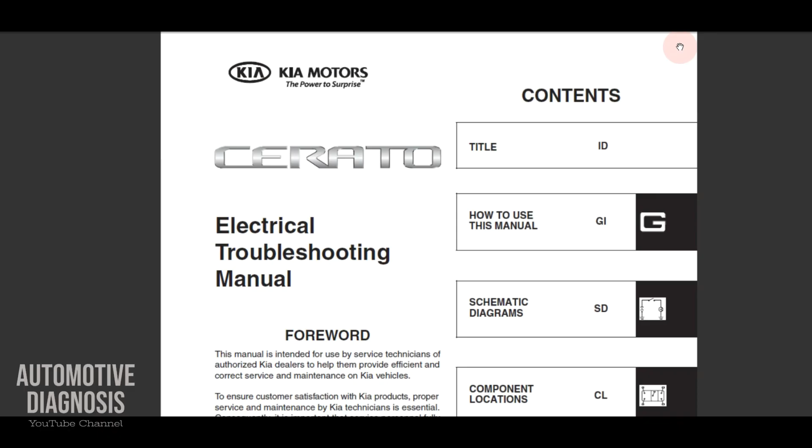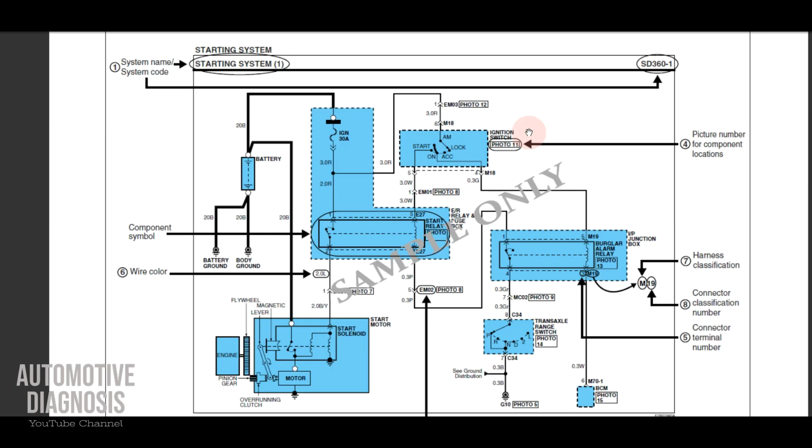Okay, let's start. So for this PDF file, I have all the systems together. At the beginning, I have a really quick introduction for reading the wiring diagram. I will explain everything later in another wiring, because here is too much information. It's really hard to explain. If you go forward, you have some other information for some symbols in the wiring as well.

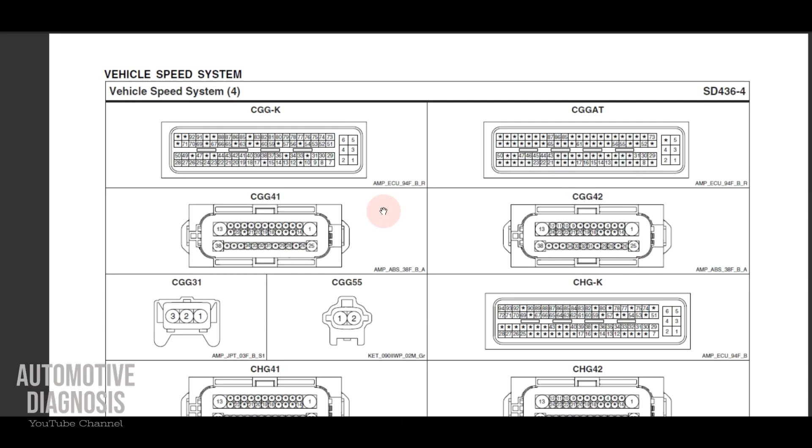But let's start just talking about a real wiring for one system, for example, the starting system. Obviously, if I go to other pages, I have other wiring like for charging system, vehicle speed, automatic transmission. All of them are in this PDF file. But I start from the starting system because it's more familiar for you guys, and it's easier to understand. So heaps of information here as well.

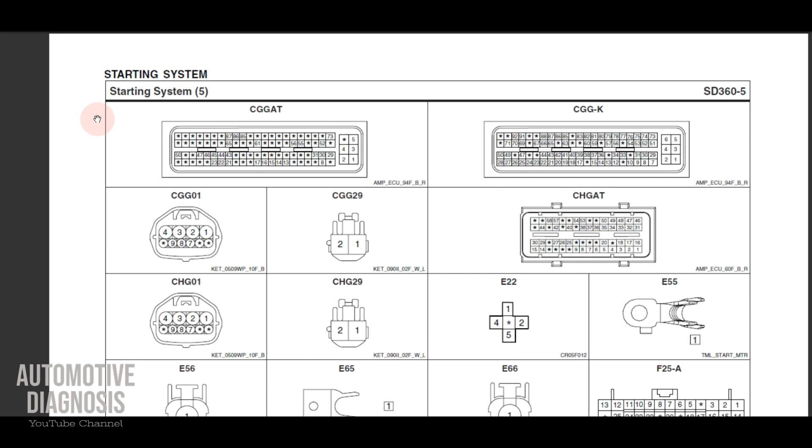So you see at the very first page, you have starting system page one. Number one shows you that you don't have only one page for this starting system. You may have different pages as well. Page 2, page 3, page 4. And the reason that I'm explaining this is because sometimes you download the file from some website, you just get one file, one page, and that page is not applicable to your car.

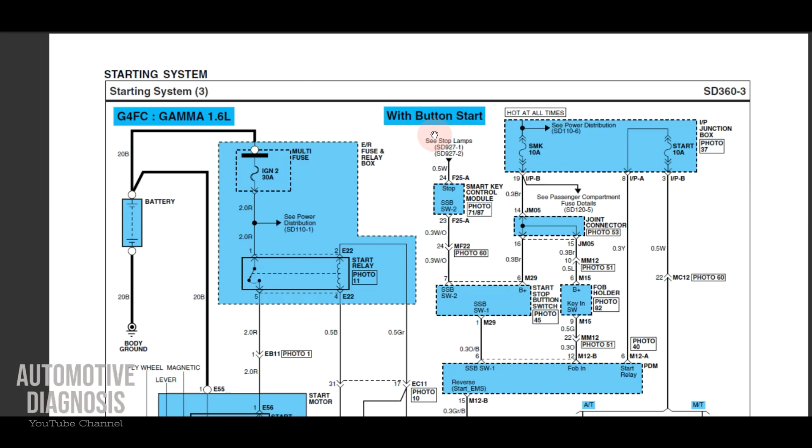Like this starting system is for the G4FC engine, Gamma engine 1.6 liter without button start. So obviously this one is applicable for this car without smart key system or button start. But if you go to the next page, you see the next page is for the Theta 2 2-liter engine, and page 3 is for the 1.6 liter engine with button start. So you have different pages for the starting system for different engine types, or when you have different options like button start on the car.

That's why you gotta be careful when you are looking at the wiring diagram. You want to make sure that it's exactly applicable to your car. Otherwise, you may have wrong information. So, I'll zoom out this one a little bit so everyone can see.

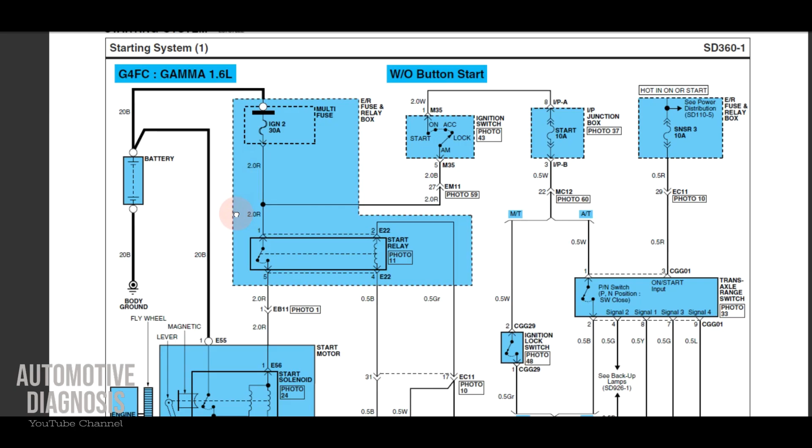So, in this wiring diagram, first of all, we have a couple of boxes shown here. All of these boxes are actually the components that are involved in the starting system. On the left, I have the battery. This is the battery. I have the ER fuse and relay box, ER meaning engine room fuse and relay box. I will explain this one because we may have different naming on Kia and Hyundai for fuse and relay boxes.

This is the ignition switch, IP junction box for the interior fuse box. Again, I have the ER fuse and relay box here as well. This is a starter, ignition lock switch, and transaxle range switch. So the first step for reading the wiring diagram obviously is to identify the components. If you don't identify the components, it's going to be really hard, maybe confusing as well. So identify the components first, then you can start finding the connections between these components to get more information.

First of all, about the component names, because this wiring diagram is for Hyundai and Kia, I'll give you some more information, like for the ER fuse and relay box. As I told you, ER stands for engine room, so this one refers to the engine room fuse and relay box. But sometimes on Kia and Hyundai we have different naming for fuse and relay boxes, so I'm writing it down on the right side of the video. If we have E/R fuse box or fuse and relay box, this refers to the engine room fuse and relay box.

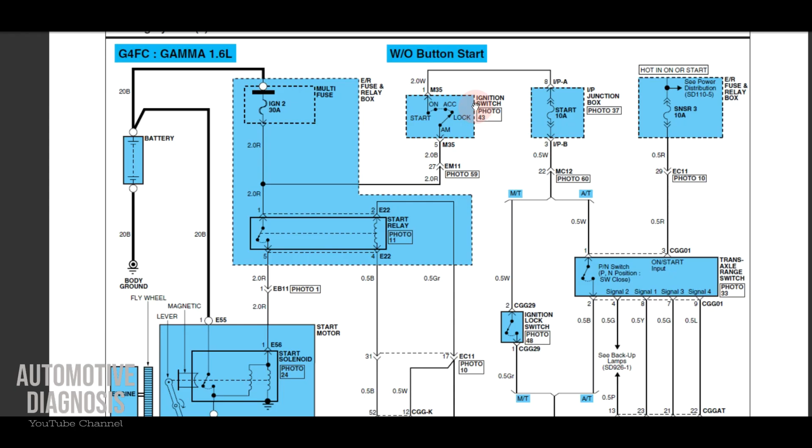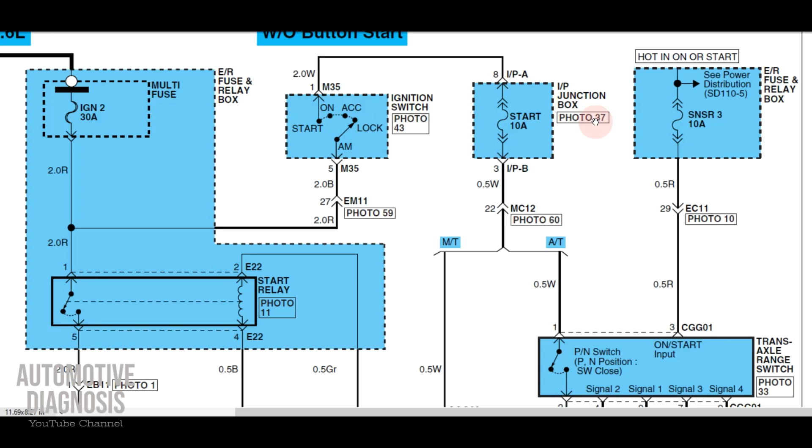So now we know the component names, because the first thing we did was identify the components. Something really important next to each component is the photo number. For this one, I have ignition switch photo 43, 37 here for IP junction box, and even some connectors in between have a photo number. This photo refers to the component location. So if you're looking for the IP junction box and you have this PDF file with all the other files together, just go to the very last pages where you can see all the component locations, in sequence by number, and find photo number 37.

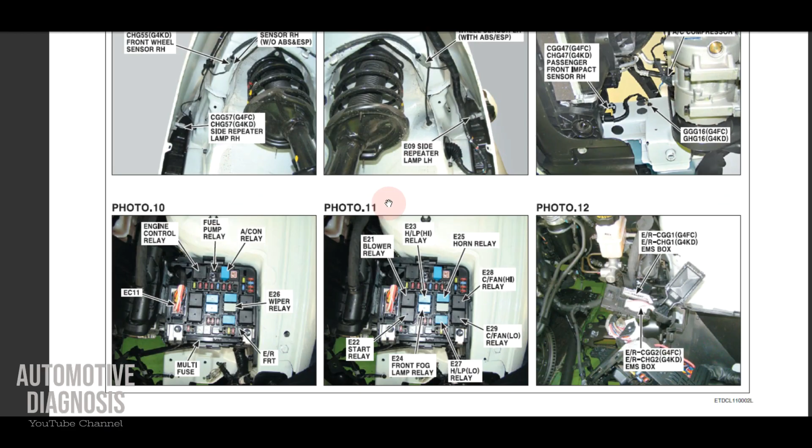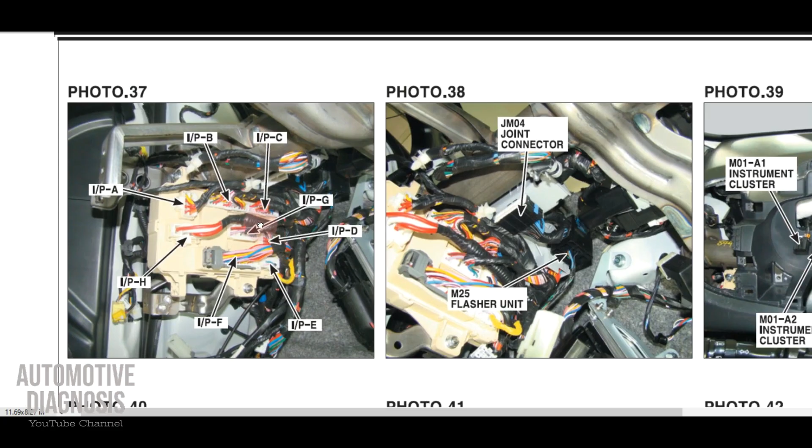Let me find it for you right now. Okay, this is the component location. You may have this in this file or in a separate file. If files are separate, you just need to download the component location file as well. We are looking for photo number 37. See, all the photos are numbered here, and you have real photos taken from the car. I find 37, there you go. Photo number 37 refers to the IP junction box, which is the interior fuse box. And you see all the connector naming and locations as well, which I will talk about later.

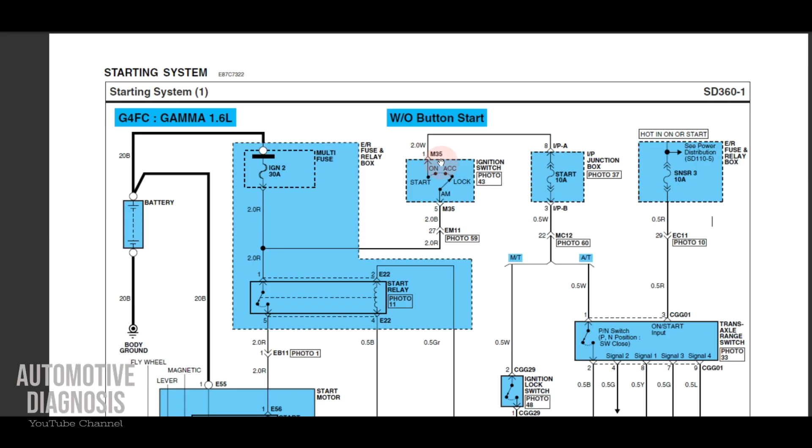You have all the other photos taken from the car as well, which will help you locate the components. If you're just looking for a component location, you can find it in the wiring diagram. But if you use the online wiring diagram or the GDS, it's going to be a bit different. I will show you later how to do that.

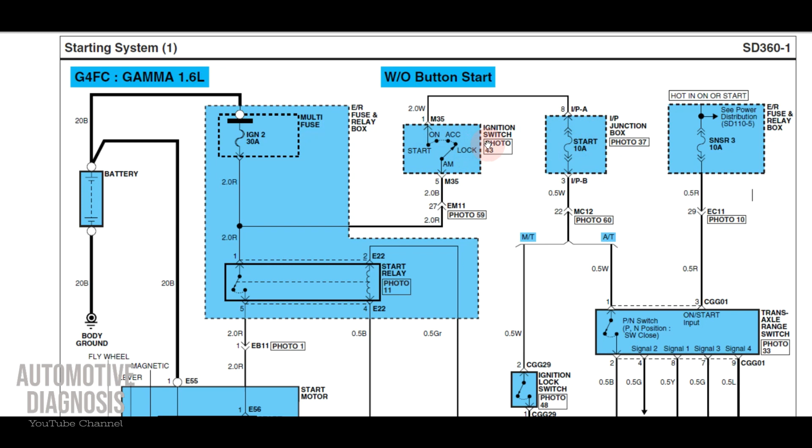Between any of these components, of course, I have the wiring. You see, I have this wiring between IPA, actually between the IP junction box and the ignition switch. So for example, if you are diagnosing a car on the starting system and the car doesn't crank at all, you are checking this fuse here, the start fuse in the IP junction box, and you see that you don't have any power on this fuse.

So technically, when you turn the ignition switch to start position, when you crank the engine, this switch will change position from lock to start, and it will pass the power from this fuse, IGN 2 30 amp, through this wire all the way to the ignition switch. And because the ignition switch is turned to start position to crank the engine, this power from this wire will go all the way to the IP junction box, to this fuse.

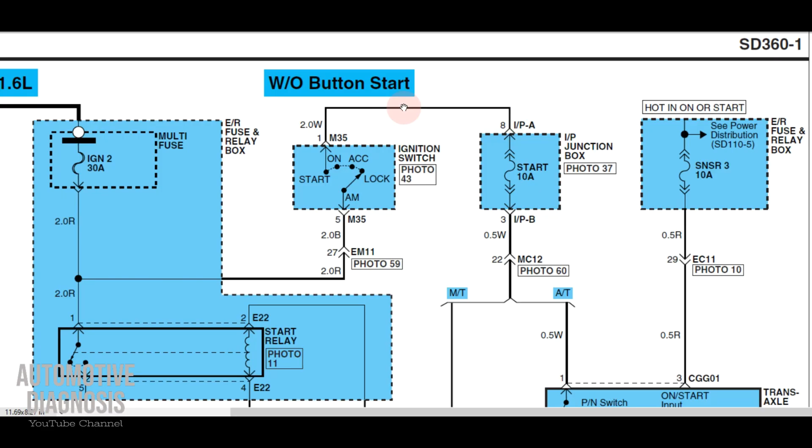So you see that the car doesn't crank, you check this fuse, and there is no power on this fuse. So it could be from anything before this, okay? If you want to check this wire, because you are trying to find checkpoints to check the wiring point by point, there are some steps that I will explain to you if I zoom in.

So for finding any single wire in the car, first of all, I need to know the color of that wire. Any wire will be connected to a connector, so I need the connector code and connector location, and inside that connector, that wire will be connected to a specific pin. So I need the pin number as well.

So I need the wire color, I need the connector code and location, because the connector code itself is not enough. I need to find the connector location as well, and the pin number inside that connector. If I have all these, I can find my wire and both ends of that wire.

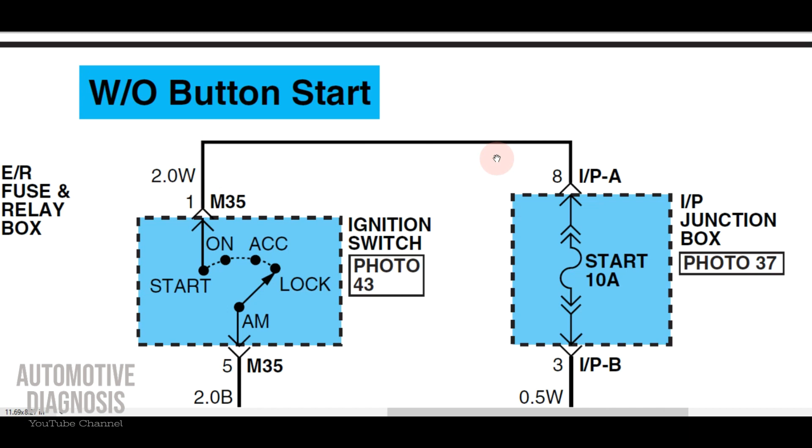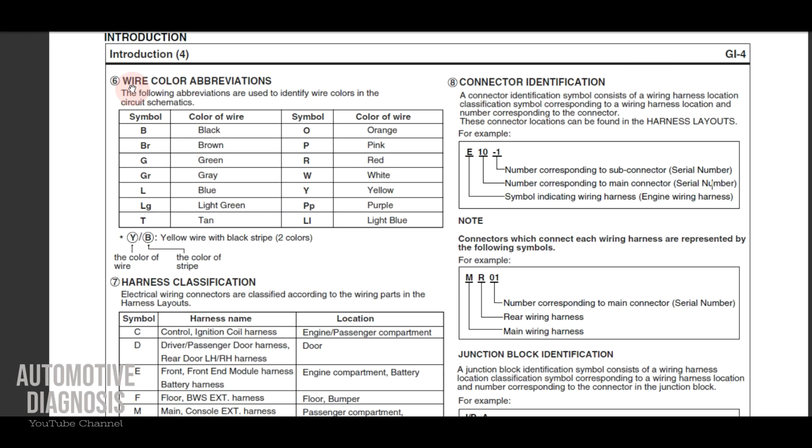Okay, so for this one, you see W here. This refers to white, so this wire is white. For any other wire, I have the color code next to the wire. So B for black, R for red, W for white. What are the color codes? If I go to the very first pages, this is the wire color abbreviations, or the color codes.

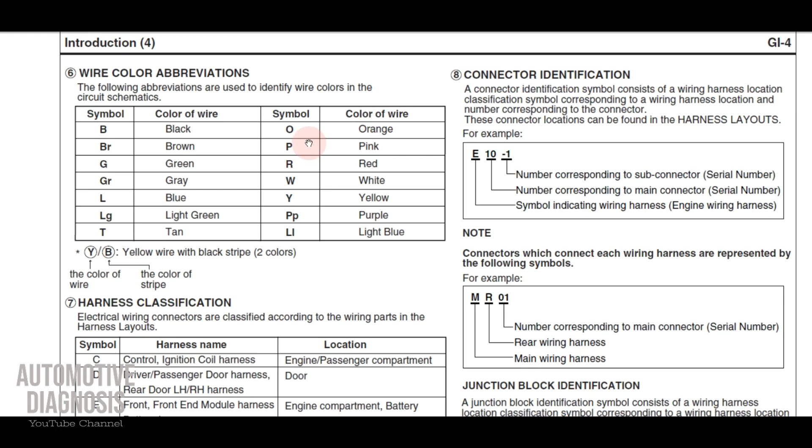For Hyundai and Kia, we have these codes: B for black, BR for brown, G for green, GR for gray. We have all these, so you can have a look. O is for orange. That's if we have just one single color on the wire, but if you have something like Y/B, the first one is the color of the wire and the second one is the color of the stripe. The main color is yellow, and the stripe is black.

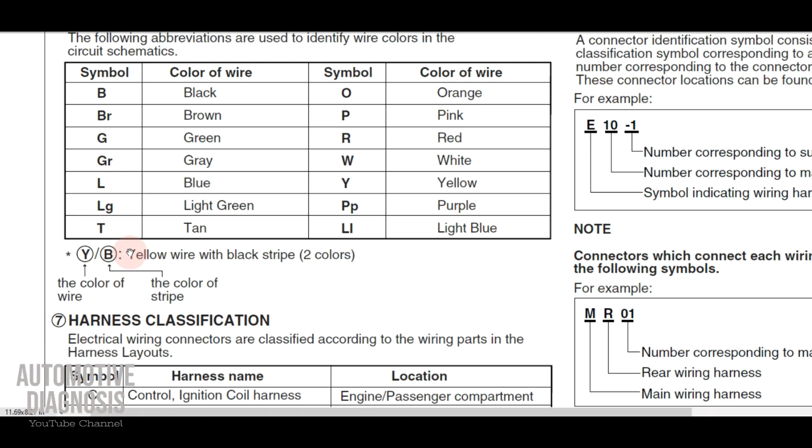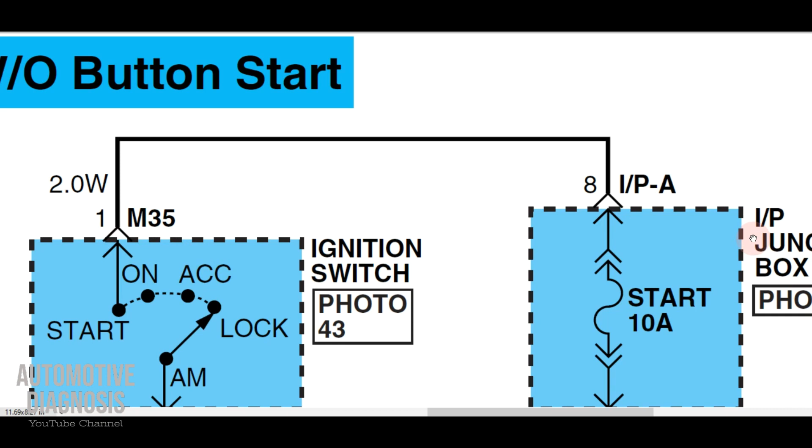Okay, let's go back to the wiring. For this wire that we want to find inside the car, we know it's white. What else? This wire is connected to the ignition switch on one side and the IP junction box on the other. So you want to find the connectors. For the IP junction box, we have the location here, photo 37 on the very last pages, or in the component location file. We know this wire is in connector IPA, pin number 8.

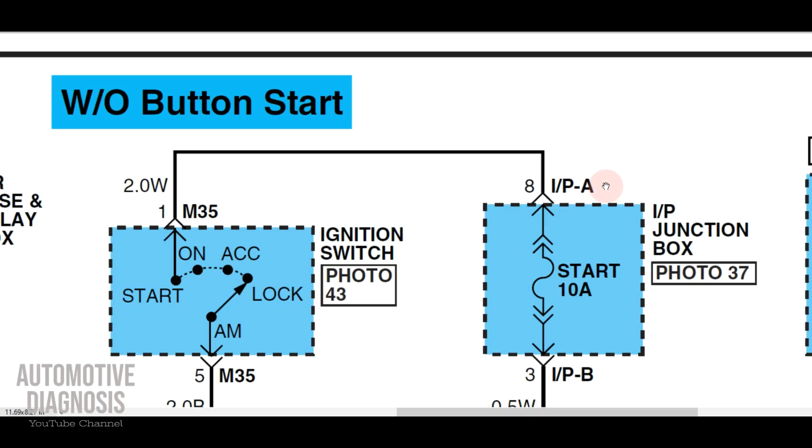This is the pin number. The one on the left is the pin number, and what you have on the right is the connector code. So which one is IPA? If you check the IP junction box, you have several connectors, so it's really confusing if you don't know the connector location. So I go to the very last page again to show you IPA.

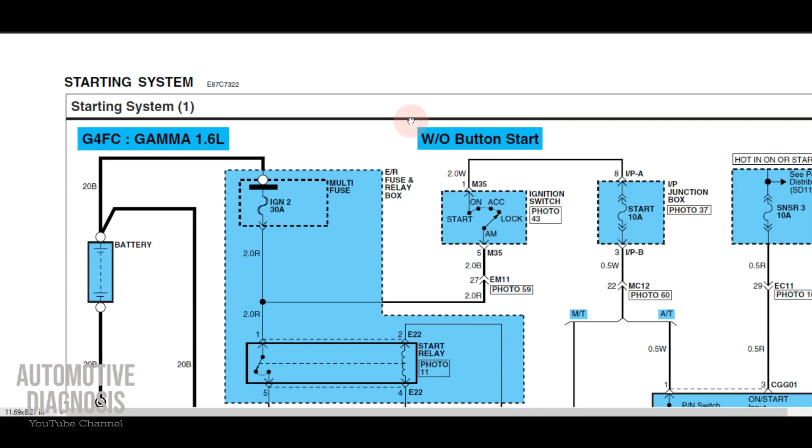So how can we find more information about the connector itself? We already found the connector location, but we need to find the pin number as well. How can we find more information about the connector? Let's see what we can find.

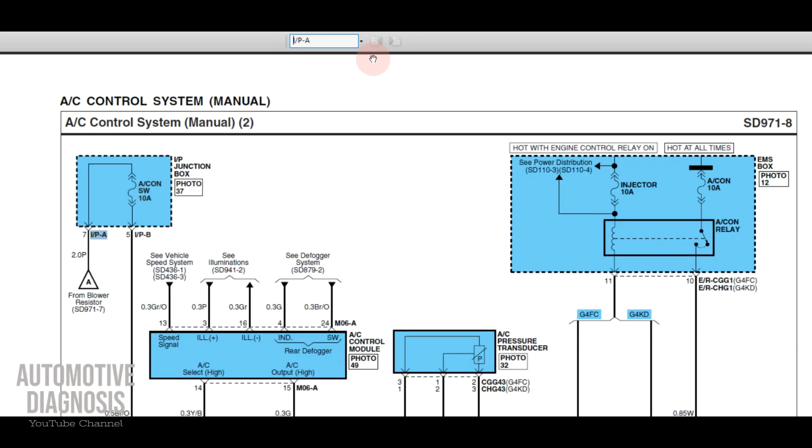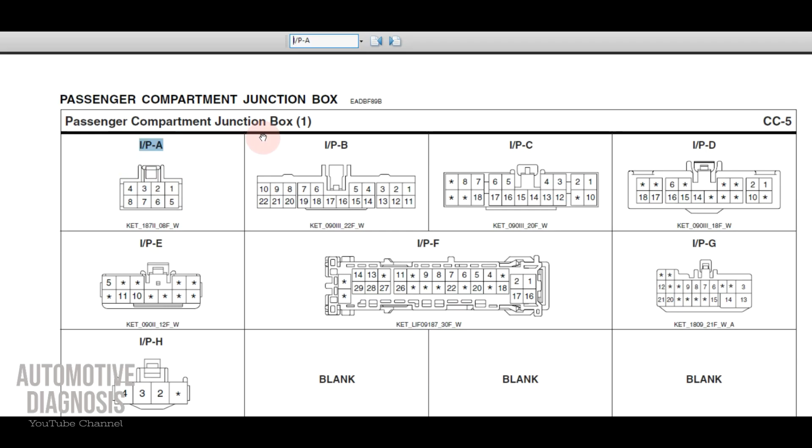Okay, I just found it. IPA, passenger compartment junction box. This is the IPA. We are looking for pin number 8, which is this one. So we have some more information here as well, like the one that we have down here. The first two sections are not really useful. The second two sections

are. So on the second sections, if we check, obviously 08 shows the pin numbers, how many pins we have inside the connector. It's more than obvious that we have 8. F stands for female, so we know that this connector that we are looking at is the female connector. If we have male here, it shows male connector. So M stands for male, F stands for female. If we have F, means our connector is female. If we have M, means the connector that we are after is male.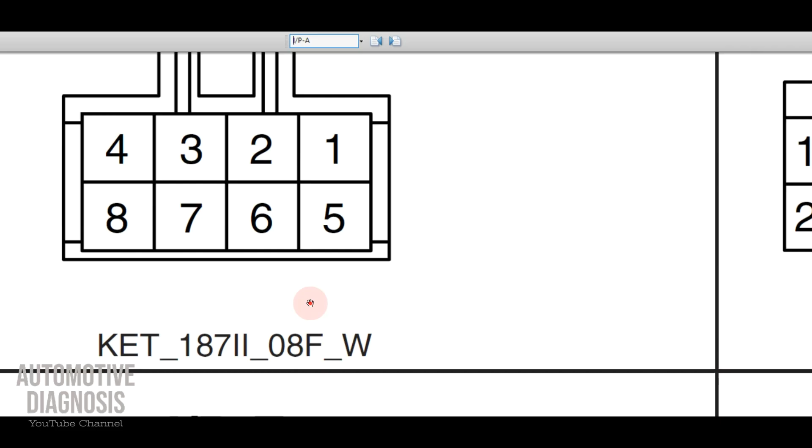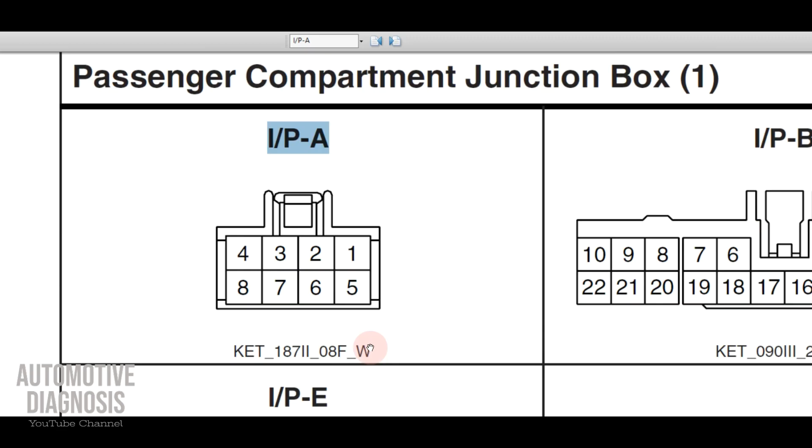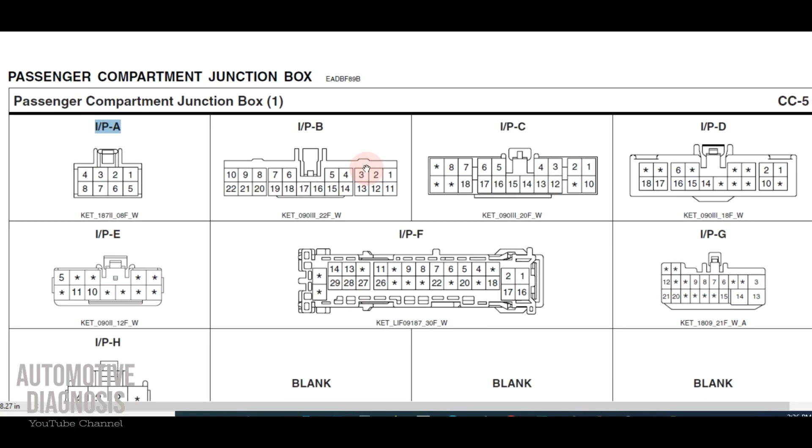And the other one, W at the end, refers to the connector color. So we know that the connector that we are after is actually white. So instead of searching, you can find the connector in another way as well. You see all the connectors are listed here. We have connector configurations as well. So if you have the whole PDF file, you can search it, or you can just find this section, connector configurations. But if you have separate files, you need to download the connector configurations as well to find the details for the connector that you are after.

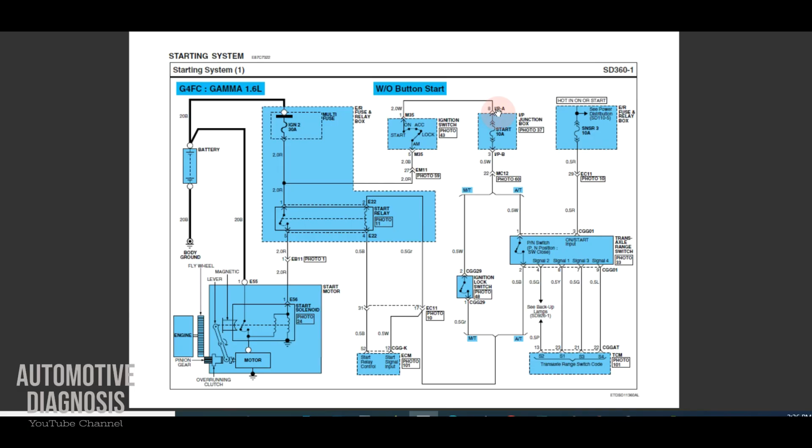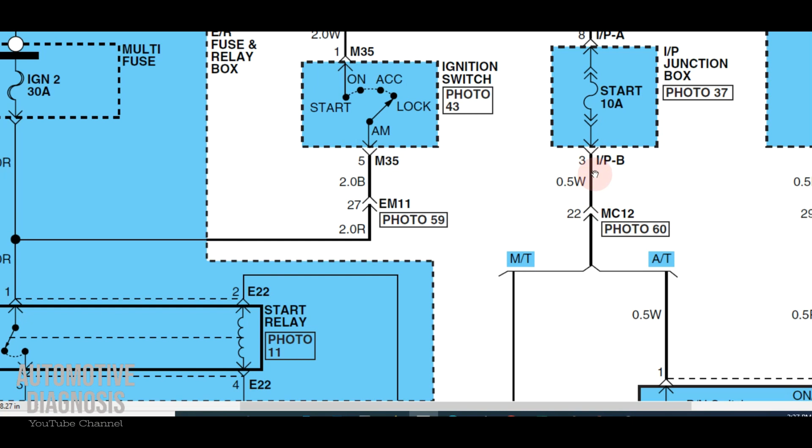So we already found the connector code, we already found the connector location, we know the pin number, we have the wire color as well. It's super easy to find the wire that we are after, right? Perfect. Sometimes we have some other sections on the wires. For example, for this wire, you see this wire is connected to IP junction box connector IPB, but you see actually at the middle there is another connector here as well. So it means this wire is not connected directly to the IPB. There is another connector as well.

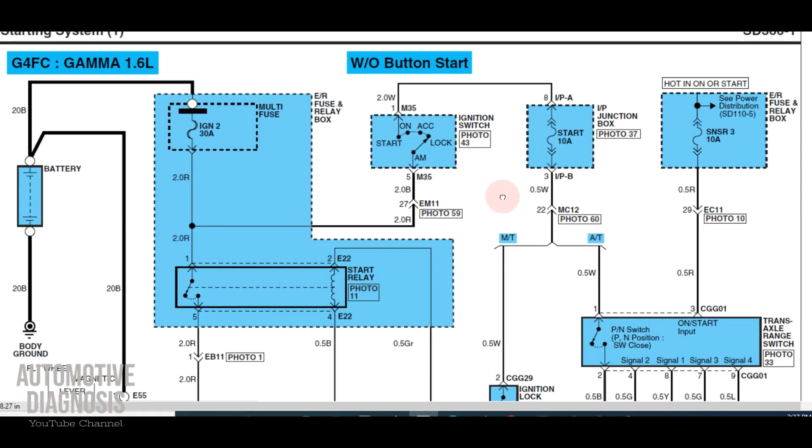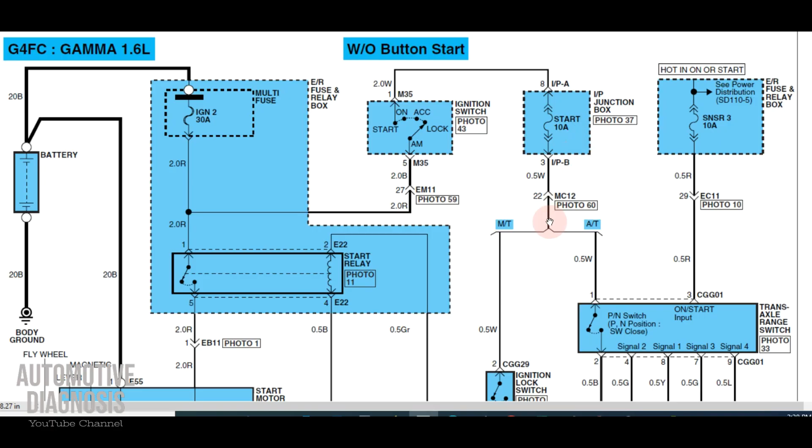So for this one, obviously the same story. You can find the connector by this code, and photo 60 is referring to the connector location for this one, and 22 is the pin number, and the color of the wire is white as well. Okay, perfect. So what else we have? First of all, some more general information. For any boxes, for any sections, for any parts you see in the wiring, which is actually provided with these broken lines, it means that you don't see the whole section of this component. Like for ER fuse and relay box, you just see the section relevant for the starting system. Like for the ignition switch, IP junction box, when you have the broken line, it means you just see a specific section of that component which is relevant to the system that you are looking at.

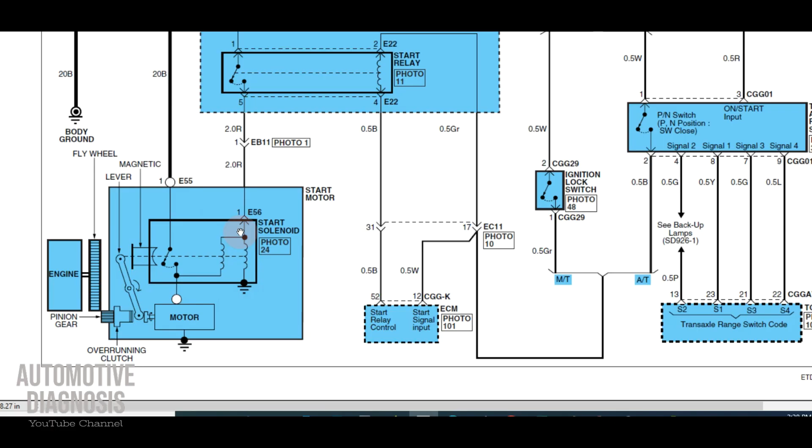But something like the starter, when you see solid line like this, it means everything for the starting system is shown here. So you don't have anything else. All the electrical sections, pins, wiring for the starter is shown here. This is the difference. If you have any relay for that system, you will see that sections as well. This sign is for the fuses. You see the fuse amp range as well. You will have some sections in the wiring diagram specifically for engine and interior fuse box as well, so you have all the details for them too.

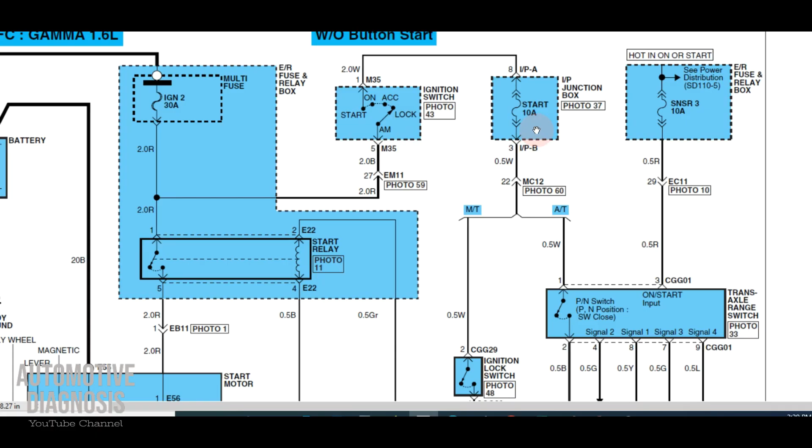There is something sometimes at the top right before the fuses, because this is the sensor 3 10 amp fuse, but you have something written at the top, hot in on or start. So this one shows in what circumstance this fuse will receive the power, because sometimes you have a fuse, when you turn the ignition off, that fuse doesn't receive any power anymore. If you don't know that, it's going to be confusing when you are checking the fuses. So for this fuse, when you turn the ignition off, you won't have any power on this fuse anymore, because when we say hot in on or start, it means that this fuse will receive the power from the battery or charging system only when ignition switch is on or start position. In any other circumstance, like when ignition switch on accessories, ACC, or when ignition switch completely off, this fuse will not have any power.

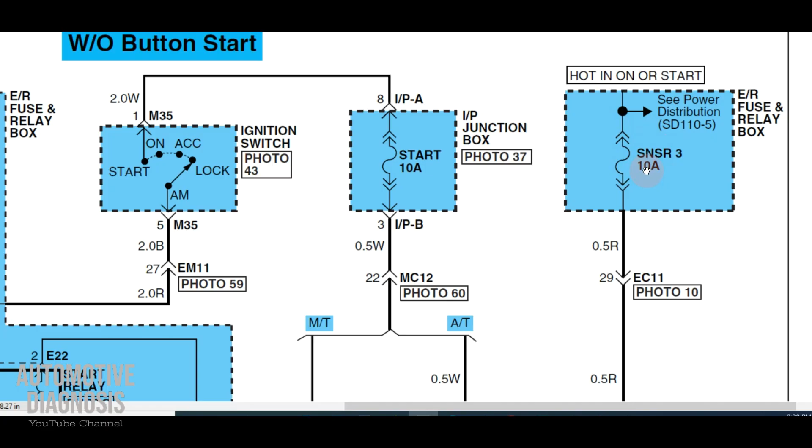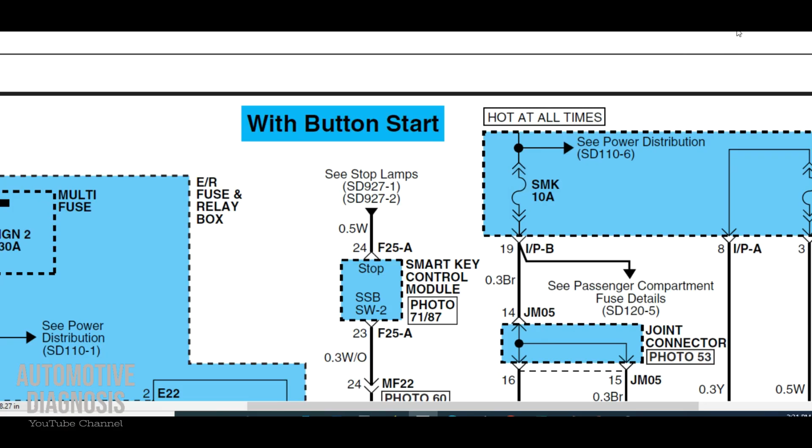But you may have some other fuses like this one. But it's written up here, hot at all times. So this wiring diagram is for a starting system for a car with button start system. And you see this fuse for a smart key is receiving the power at all times. So you should be expecting the power on this fuse even if the ignition switch is completely off. Okay, let's go back to our page.

But technically, how can I read the wiring diagram? Because what I did so far is just to identify the components, find the wire color, pin location, pin numbers, connector location, connector numbers, and all sort of things like this. But what I do normally for reading the wire diagram is just to find the starting points. Okay, because if you don't have any start point, it's going to be really confusing for you guys to read the wire diagram.

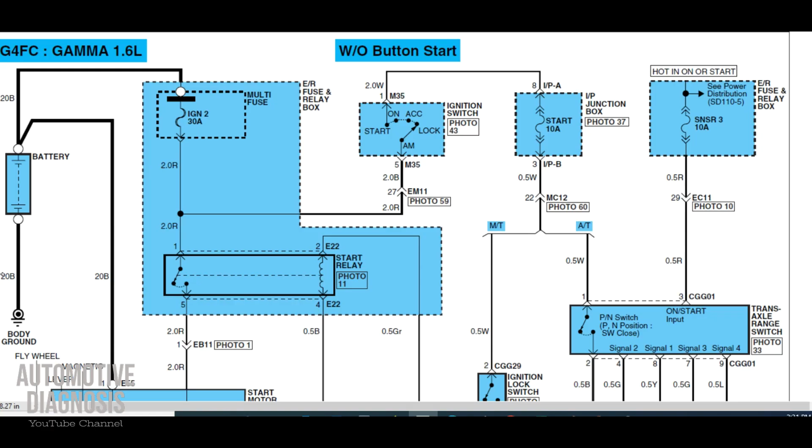So what you need to do is find a starting point. For example, for a starting system, the starting point for this system is the ignition switch, where you start the car, when you crank the car. Okay, so you will start from there. Just imagine that this is the ignition switch.

Start from the ignition switch, because the wiring diagram that you see is when this system is not working. So you need to start thinking how this wiring and this system will work if you activate it. So try to think, if I turn the ignition switch to start to crank the car, what will happen? The first thing which is going to happen is this fuse, which already provided the power from the battery to this wiring, is going to provide the power to this line as well.

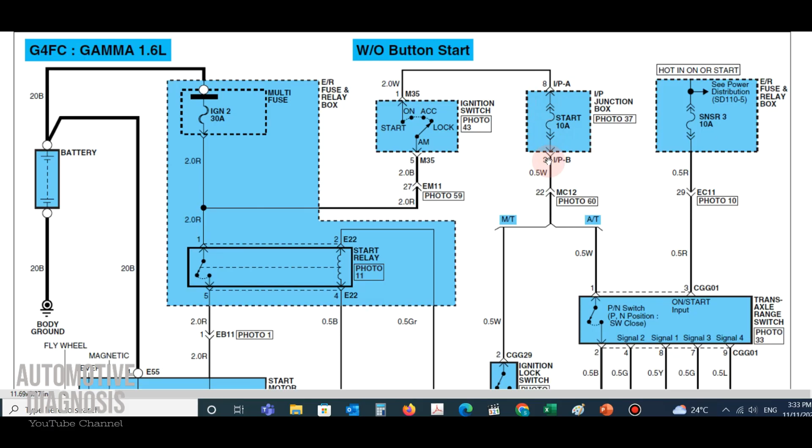And as soon as you turn the ignition switch to start position, this power is going to travel all the way from here, from this white wire to the IP junction box to the start switch to a start fuse. And if the start fuse is okay, this battery power is going to travel all the way from IPB pin number 3 to another wire color. It goes to connector MC12 pin number 22, which is located here in photo 60, and it will reach this position. But here we have two different sections.

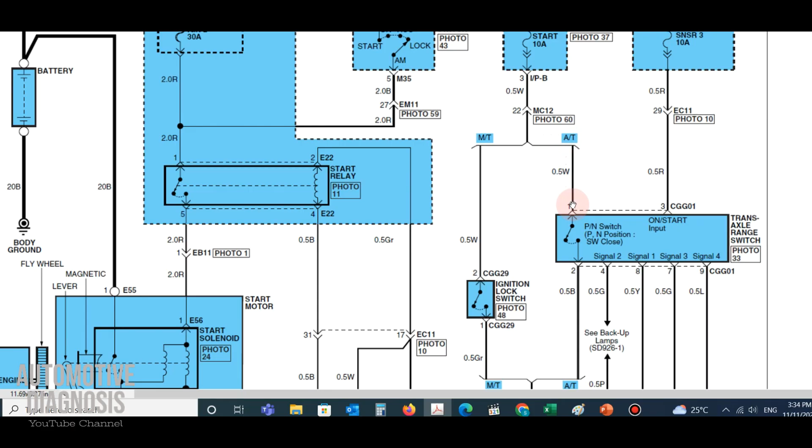If your car is equipped with manual transmission, you need to continue reading the wiring diagram from here. But if your car is equipped with automatic transmission, you need to continue from here. This is AT, stands for automatic transmission. So if you have automatic transmission, continue reading the wiring diagram from this section. Go all the way down. You reach this component, which is the transaxle range switch, or sometimes it's called inhibitor switch. So you see the inhibitor switch.

This battery power is going to go through the inhibitor switch, and obviously the only time that you are able to start the car, to crank the car, is when the transmission is in park or neutral position. And you see that PN switch. So it means if your transmission is in drive or reverse, you won't be able to start the car. And sometimes this transaxle switch is out of adjustment, so you need to adjust it or replace it if it doesn't let the power go through, even if the transmission is in park or neutral position.

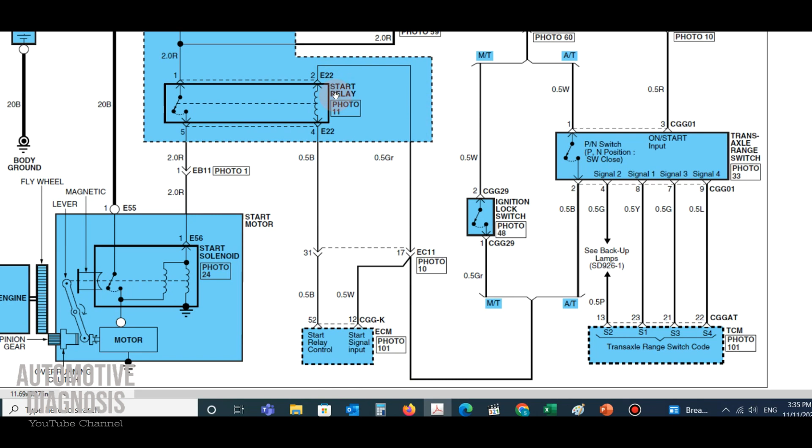But if it's okay and the transmission is in park or neutral position, this battery power is going to travel all the way from here. It will go back to this wire, and it will go up this gray wire all the way to the starter relay. Okay, so I have the starter relay here. If you guys know about relays, that's okay. Otherwise, I will make another video showing you guys how to check different relays.

But for this starter relay, you see the internal structure is provided as well to make it easier for everyone to understand it. For any relay, we have a coil and we have a switch side. So for any coil to activate the relay, we need the battery positive and negative. Positive is already provided from the wire that we were chasing, and the other side should be connected to the negative. On this car, if we continue the wire, it's connected to the ECM, engine control module, and you see start relay control. It means the ECM is responsible to provide the negative to control and activate the starter relay.

And you may notice there is another line from this positive to the ECM. This is actually a kind of feedback, a kind of input to the ECM. When you start the car, right before providing the power to the starter relay, there is another wire providing this power to the ECM as well, just to show the ECM that the start relay must be activated. So the ECM, after getting this signal, will provide the negative to activate the starter relay.

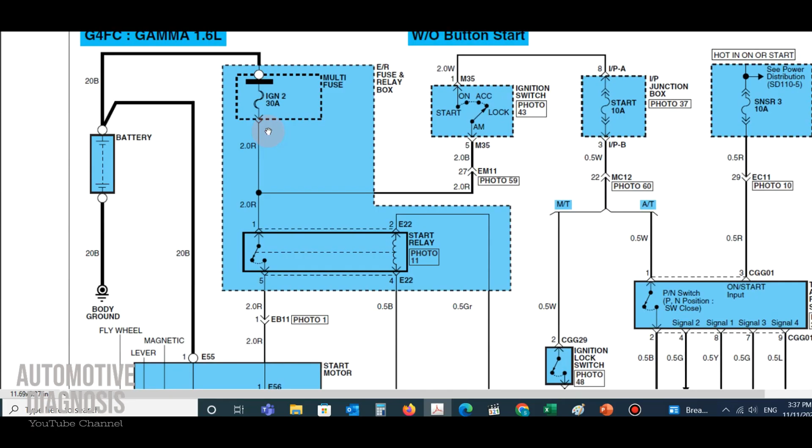Okay, so we already provided the positive to pin number 2 on the starter relay, and the ECM provided the negative as well. So what will happen? This will energize the relay to create a magnetic field, and it will close the switch. When the relay switch is closed, power from this relay will travel all the way down this red wire to the starter solenoid. This is the starter solenoid, and the reason the starter solenoid is much bigger than the starter motor in this wiring is because they just wanted to show the detail of the starter solenoid here. It doesn't mean that the starter solenoid is bigger on the real starter. They just wanted to show the details.

And as you see, this power will go through the starter solenoid pull-in and holding winding inside the solenoid to actually activate the starter, to pull in the plunger and activate the starter.

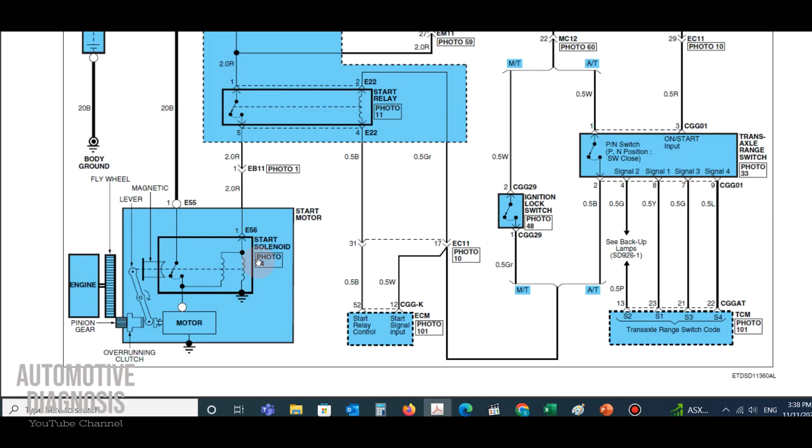So the last section for explaining the starting system was actually to show you how we can get the information from the starting system, because anytime, for example, for this one, if the car doesn't crank, you need to find some points to troubleshoot the car. For example, if you won't be able to crank the car, you can check the starter relay. You can remove and check the starter relay, or you can just put your finger on the starter relay. If it's clicking, it's giving you some idea.

But what I do normally, if the car doesn't crank and I think it's from the starter relay, because when I start, I don't hear the starter relay operation or clicking sound, I will swap the starter relay with another identical relay, just a quick fix. If it works, certainly it's from the starter relay.

Otherwise, what I do, I check the power supply on this pin, because if you remember, I explained that the power has to travel all the way from the ignition switch, this fuse, inhibitor switch, and back from all this wiring to here. So when I turn the ignition to start position, I ask someone to start the car, and I check the power here, the positive here.

If I do have the battery voltage here, it means that everything before the relay was working properly. I need to focus on everything after the relay. But if I don't have the power supply here, it means that everything before this one must be checked. But do I need to check them all one by one? No, I check another checkpoint like this fuse.

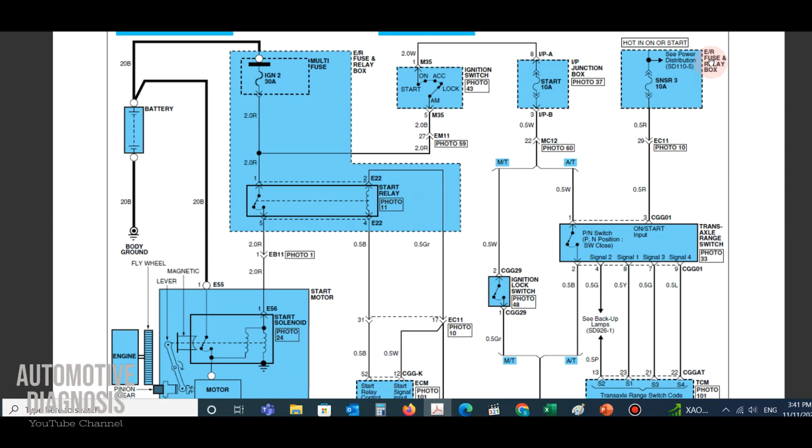Let's have a look at the wiring when you are using the GDS or online website. Okay, this is the online website. If you are using the GDS, the KIA and Hyundai original scan tool, you have exactly the same wiring diagrams. So you see it is exactly the same as the PDF file, but you have some more access. Some other things are much easier to be found, like the component name, component location, everything like that.

But do you remember the connector code? For finding the locations, we used the IP junction box location to find IPA. You remember that? But now, if I stay on the IPA, I have a link here. If I click on the IPA, I have the connector detail, IPA, all the connector detail I had, including the code down there.

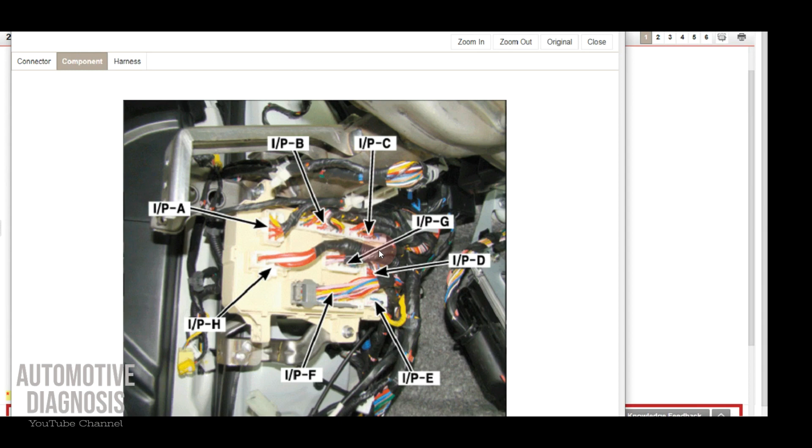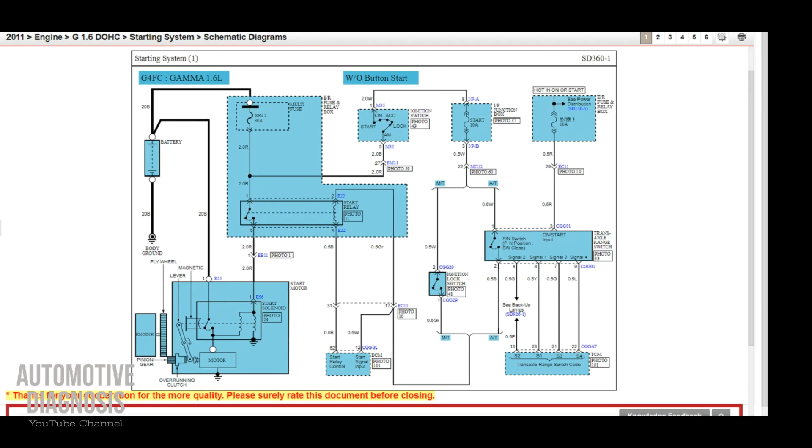If I click on the component, I see the component location. This is the IPA and all others, and even the harness. I can look for the IPA, which is this one, in the wiring harness. So this is the easiest thing about using the GDS, but everything else is completely the same.

So if you don't have the GDS, take it easy. Just look for the PDF file. It's exactly the same. You can use it for troubleshooting.